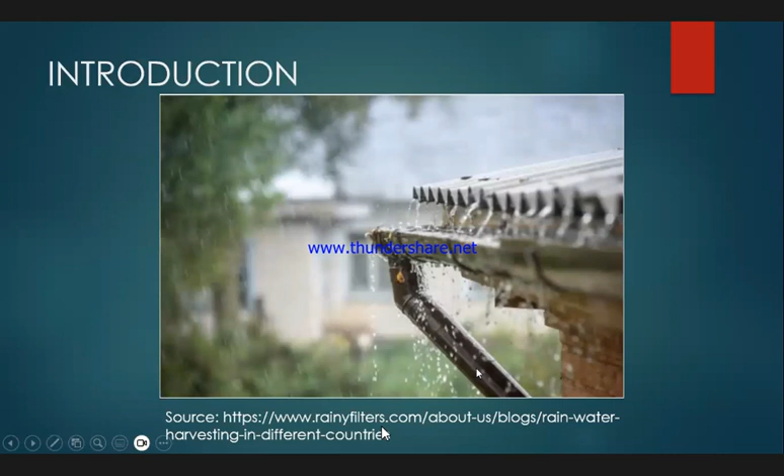We are all aware about the value of water. We can survive for 21 days without food, but barely 3 days without water. The existence of a planet can be justified through the presence of water. Globally, the majority of the Earth's surface is salt water and only 2.8% is fresh water. This fresh water can be found in groundwater, lakes and streams, and in glaciers and ice caps.

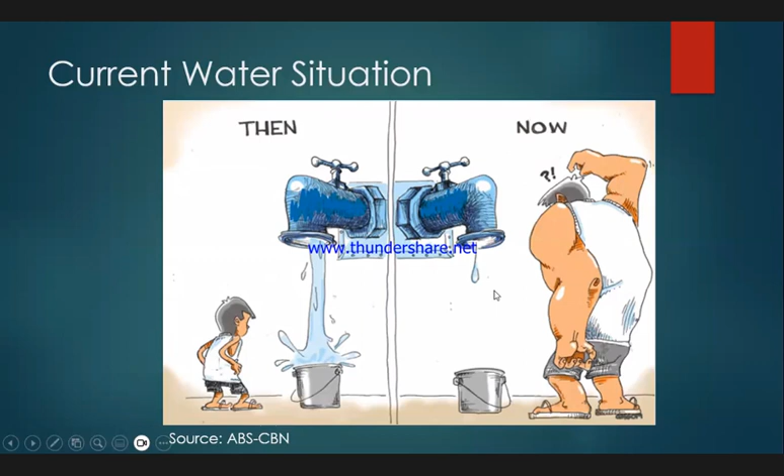This caricature is very significant, and it shows the current water situation, not only in our country, but globally. The then and the now really exists, and it speaks for itself. We had too much water then, but now we are experiencing water stress, and we can blame it on population explosion, which nobody can control.

Let's take a look at the water cycle. It follows the path of water within the earth and in the atmosphere. What we really expect as common people is that rainwater will become groundwater or fill surface water sources. But the reality is, when rainwater becomes groundwater, there's a possibility of it being over-extracted, or when it fills surface water, there's always the tendency of contamination.

In other parts of the world, water is being harvested in its vapor form, but that is too technical and expensive. There is something easier that has already been practiced in the Philippines and all over the world, but it's not yet taken seriously, especially in our country. We are always focused on groundwater and surface water, and we forget that we have an option: to harvest rainwater before it reaches the ground.

As I was saying before, harvesting rainwater is not a new practice. It has been practiced in the Philippines and all over the world. But before that, I would like to reiterate that we have groundwater and surface water issues, especially in our country. In 1998, the National Water Resources Board, through its National Water Resources Master Plan, identified 9 water-stressed cities. But recently, through the completed projects of NWRB, the problem is extended to other cities and municipalities in the country.

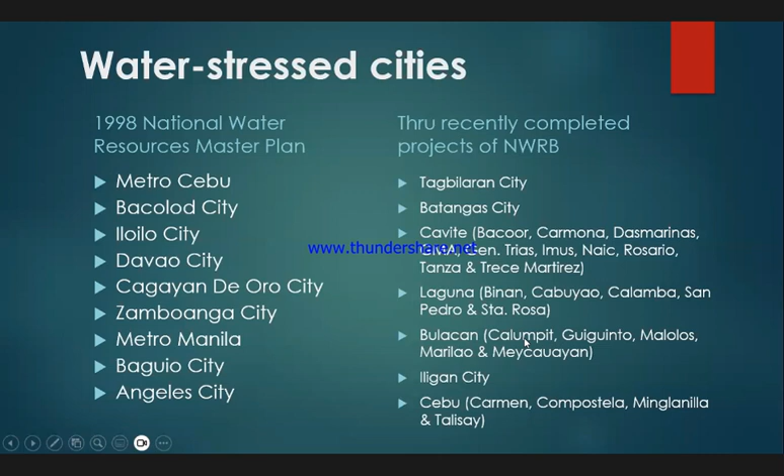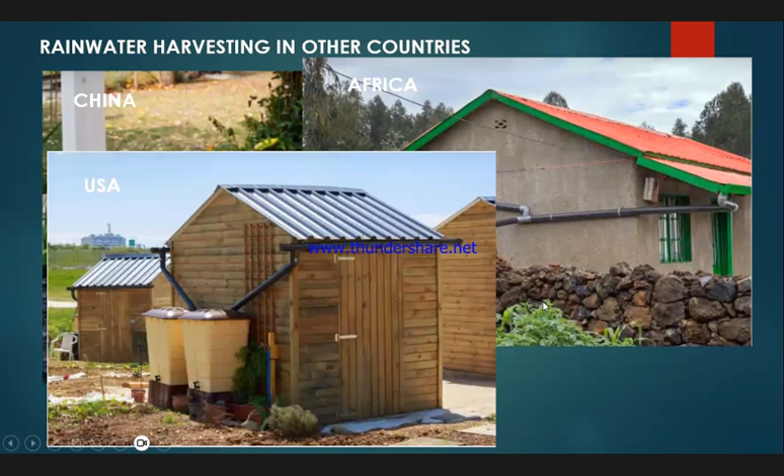So this is the reason why we should consider an alternative: rainwater harvesting before it reaches the ground. Rainwater harvesting has been practiced remarkably in China, Africa, the US, India, and Australia. In Australia, I was able to personally witness a treatment facility for rainwater, or stormwater for that matter. They don't just collect rainwater that falls on roofs.

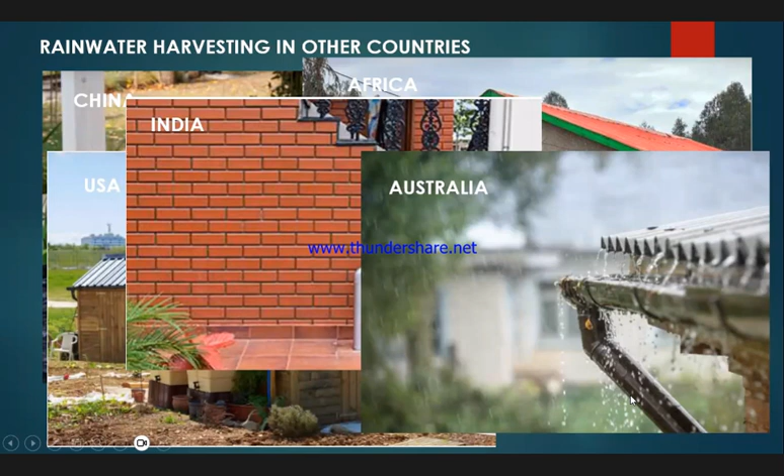They collect all rainwater and stormwater, and they are actually adopting a separate system of sewerage, wherein stormwater directly goes to the facility for treatment. And of course, there are a lot of things behind that, and it's the people who benefit from it.

The objectives of this study include building a suitable prototype of a rainwater harvesting system that will optimize the amount of harvested rainwater in meeting the daily water consumption of a single household, to determine if the quality of the filtered harvested rainwater will satisfy the Philippine national standards for drinking water, and to establish the economic viability of the proposed design of the rainwater harvesting system.

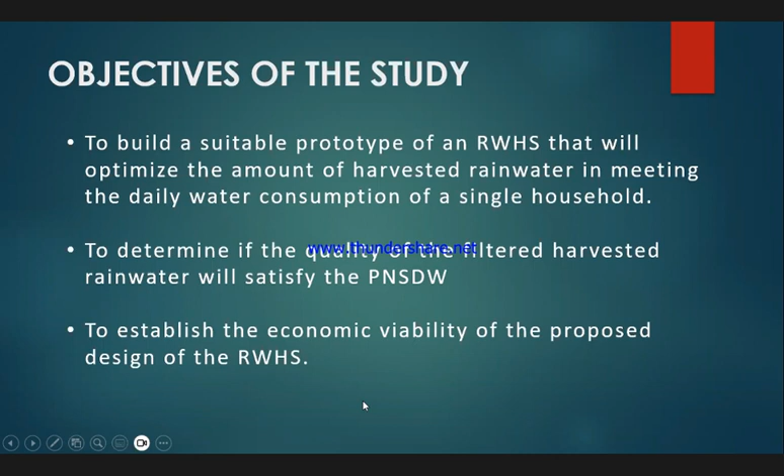The study area is located in Malaybalay, Bukidnon, and the area has a type 4 climate. The type 4 climate indicates that rainfall is more or less evenly distributed throughout the year, although during February, March, and April there is a lesser rainfall amount.

So why Bukidnon? Actually, we cannot propose something like this in Metro Manila or in other cities because we are enjoying taps in our houses, and I think this will not be attractive to people in the National Capital Region. That's why we chose Bukidnon as the study area, and also because many areas are not yet...

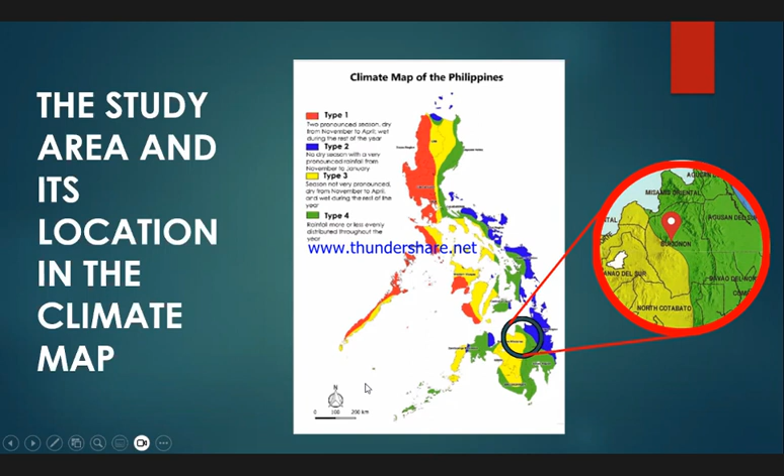...catered by water utilities. The methodology includes data gathering, installation of the rainwater harvesting system, the harvesting period, and data analysis. For data gathering, all meteorological data were gathered from PAGASA.

Water demand is considered 80 liters per capita per day in Region 10, based on an NWRB publication. The average household size, based on the Philippine Statistics Authority, is 5 persons per household. The rainwater harvesting potential is calculated using the rational method, Q = CIA, where C is considered 0.90 to account for losses, including evaporation and others.

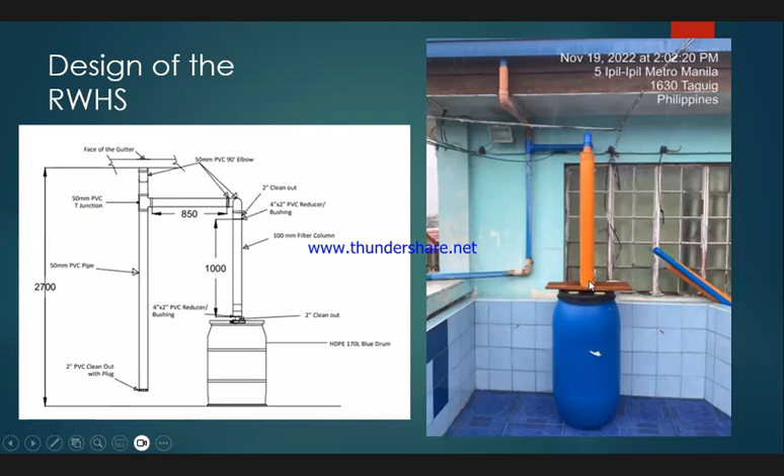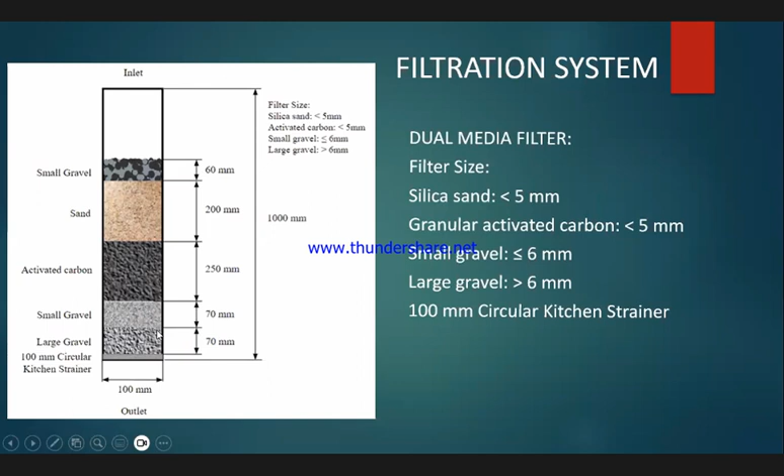The rainwater harvesting system was installed in October to November 2022, and the samples were taken in December 2022. Six rainwater samples were collected for quality testing, three unfiltered and three filtered. The parameters sampled were pH, iron content, and total coliform count.

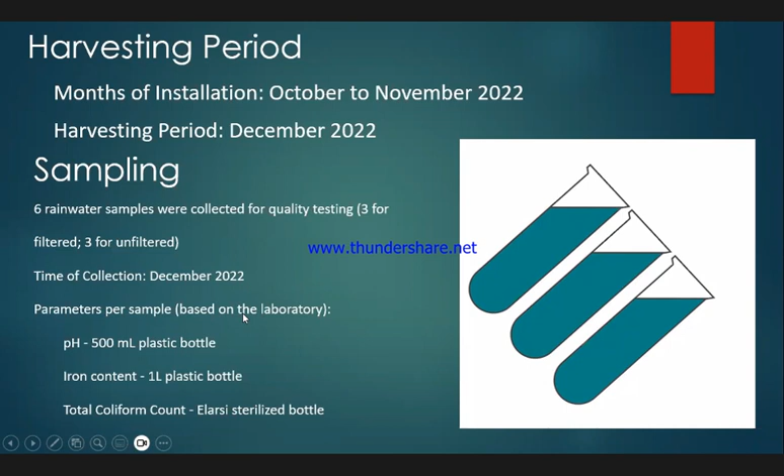Preservation and collection of samples were based on the instructions of the laboratory. For the data analysis, the data were analyzed for its sufficiency, water quality, and economic analysis.

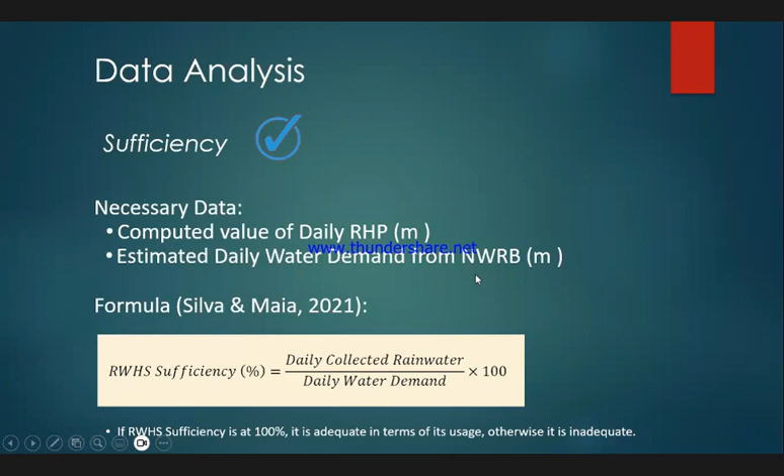For sufficiency, the formula used was daily collected rainwater divided by the daily water demand. If the sufficiency is at 100%, it is adequate. Otherwise, it is inadequate. By the way, I would like to mention that the catchment areas considered in this study are the roof areas of the residential houses.

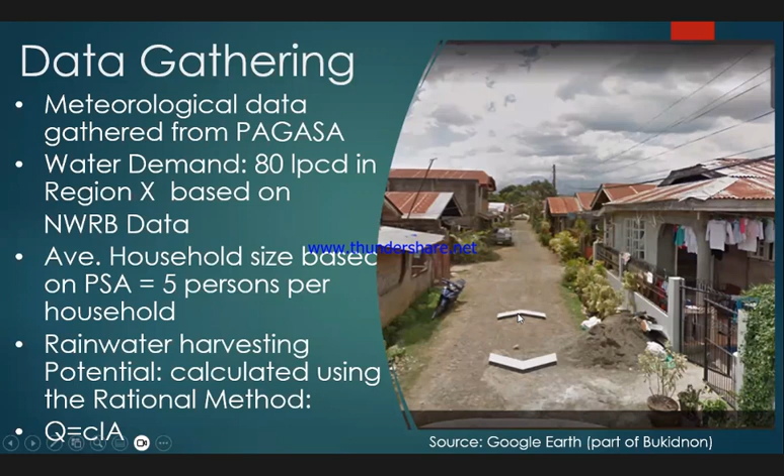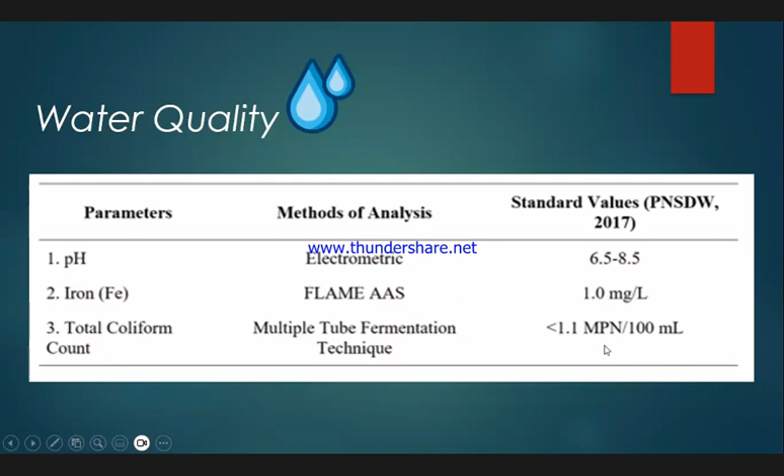For water quality, pH, iron, and total coliform were compared with the Philippine National Standards for Drinking Water. For the economic analysis, the payback period was used, calculated using the construction cost of the installed rainwater harvesting system divided by the water savings.

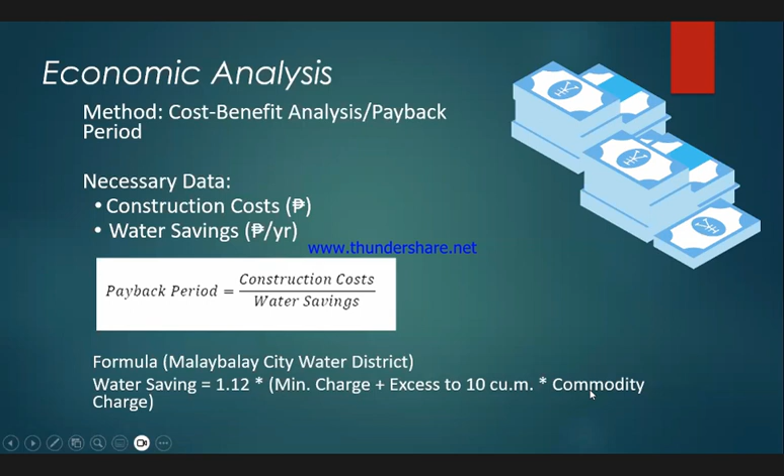The water savings was calculated using the formula of Malaybalay City Water District, and it includes the minimum charge, in excess of the minimum amount of water that is supposedly used by the constituents, and commodity charge.

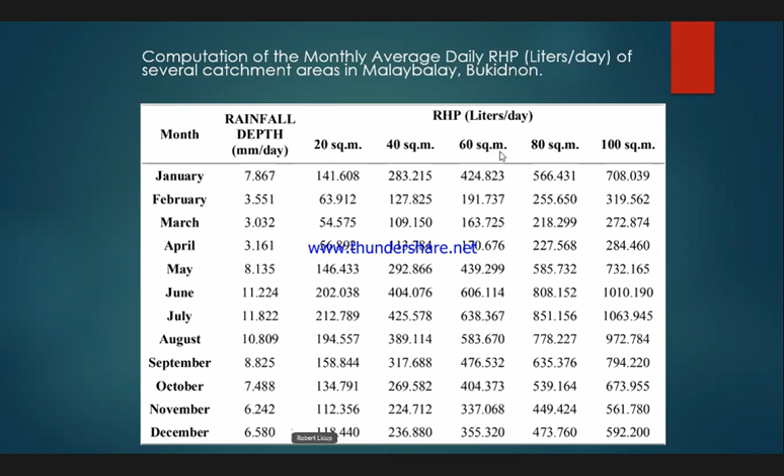The first column shows demands, rainfall depth as gathered from Pag-asa, and these are the rainwater harvesting potential in liters per day of different roof areas. So we considered 20 square meters, 40 square meters, 60 square meters, 80 square meters, and 100 square meters.

The comparison was graphed, and we can observe from this figure that the green line represents the daily water demand. It was observed from the graph that houses with areas of 20 and 40 square meters do not meet the daily water demand, while roof areas with 60 square meters and above can meet the daily water demand for all months except February, March, and April.

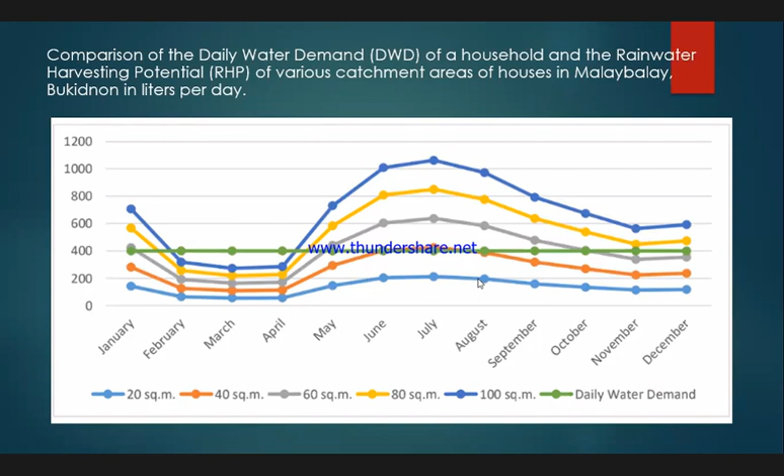But then we can observe also a surplus in this part of the graph, and the surplus can be used and stored to be consumed or to cater to constituents during the lean months of February, March, and April.

Consistent with the last slide, the values of sufficiencies were also calculated. As mentioned in the previous slide, using the formula for sufficiency, it appears that for catchment areas or roof areas with 60 square meters and above, sufficiencies are around 100% and more. So it's consistent with the last slide that roof areas with 60 square meters can satisfy the daily water demand.

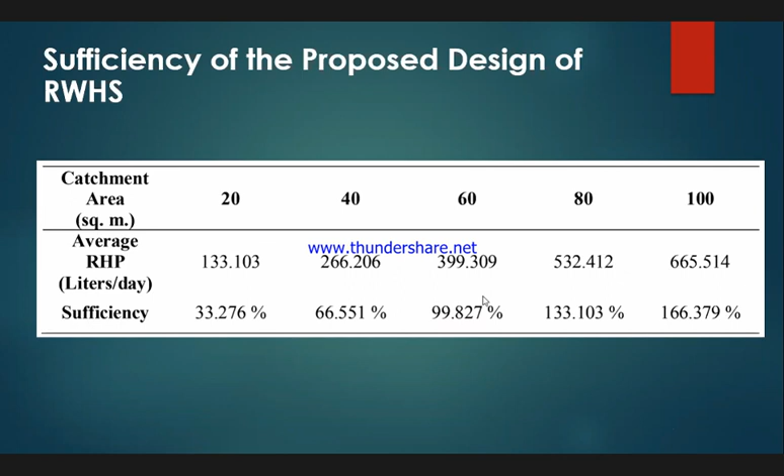For the water quality analysis, pH and iron, although the values are from unfiltered rainwater results from the laboratory, these two values are within the Philippine National Standards for drinking water.

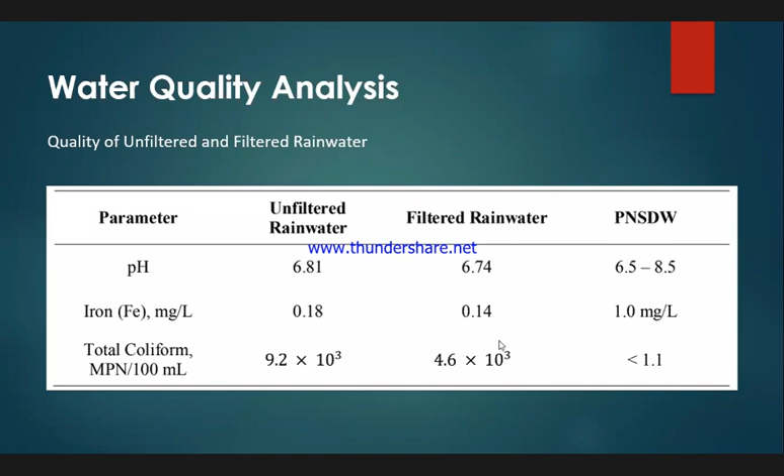Although after passing through the filter column the values have been adjusted, they are still within the Philippine National Standards for drinking water. But for the coliform count, although it has been reduced to a certain value, it does not meet the standards for drinking water.

Okay, so for the economic analysis, this table shows the monthly water demand, monthly daily water demand. This column represents an average of 5 persons per household, and 80 liters per capita per day water requirement, which is 12 cubic meters per month.

Now, this rainwater harvesting potential has been calculated in the previous table, and this savings is actually calculated using the formula used by Malaybalay City Water District. It also appears that there will be more savings if the roof area is 60 square meters or more.

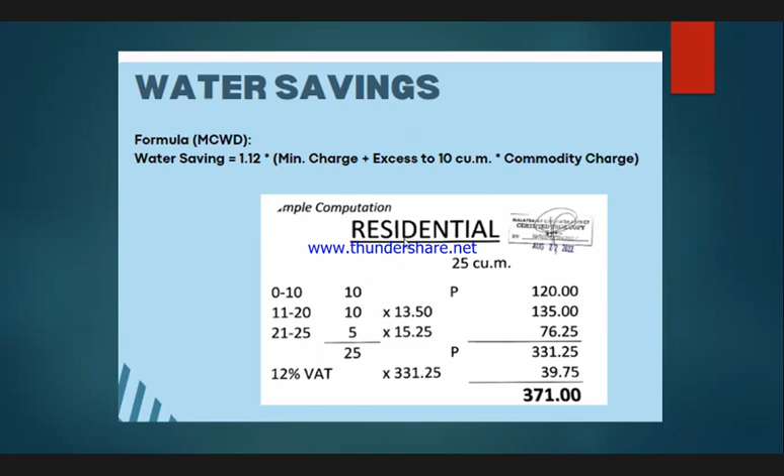This is how the water savings is calculated. Now, the water savings in this particular study refers to the amount that they are supposed to pay to Malaybalay City Water District if they are connected. In other words, if they install their own rainwater harvesting system, the amount they would have paid to Malaybalay City Water District is considered the savings.

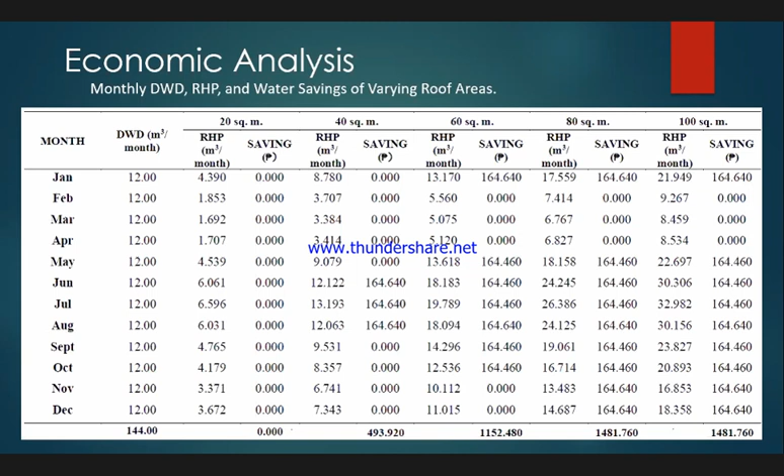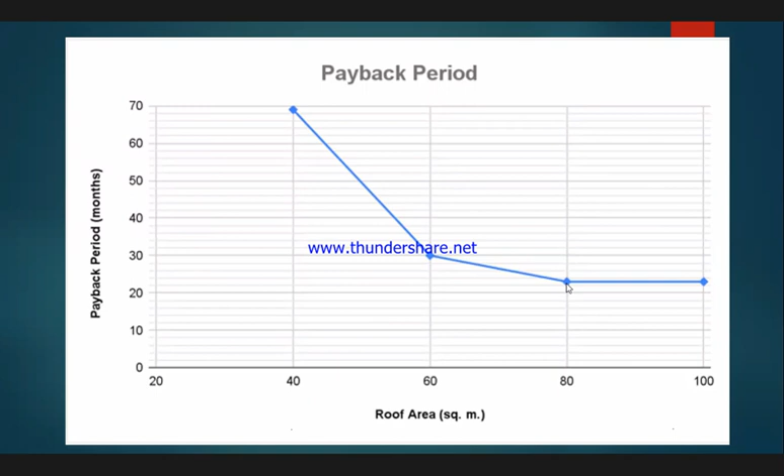And using the payback period for the 60 square meters roof catchment and above, the payback period is around 30 months for catchment areas with 60 square meters, and around 24 months for catchment areas with 80 square meters and above.

So, in conclusion, the proposed rainwater harvesting system in Bukidnon is sufficient for 60 square meters and greater catchment areas. pH and iron content are adjusted by the proposed filter column, although in this particular experiment, pH and iron need not be adjusted anymore because they are already within the Philippine National Standards for Drinking Water.

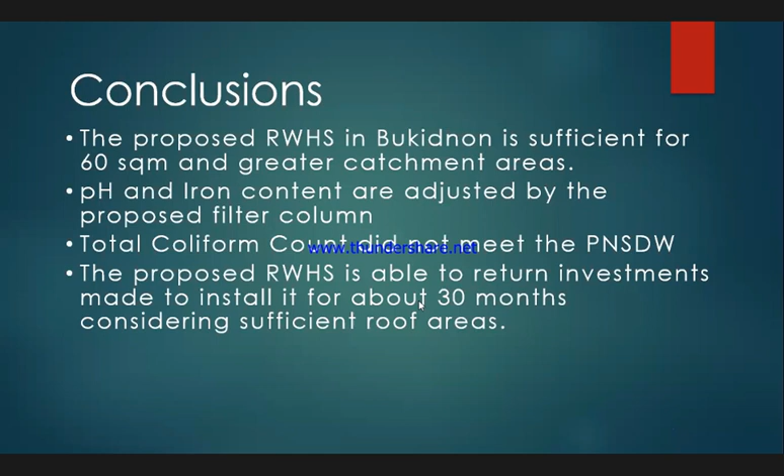The total coliform count did not meet the Philippine National Standards for Drinking Water. And lastly, the proposed rainwater harvesting system is able to return investments made to install it in about 30 months, considering sufficient roof areas.

For the recommendations, we recommend considering the possibility of disinfection after filtration, especially if the water is intended for drinking. Also, it is recommended that testing of other parameters be done to test the efficiency of the filter column.

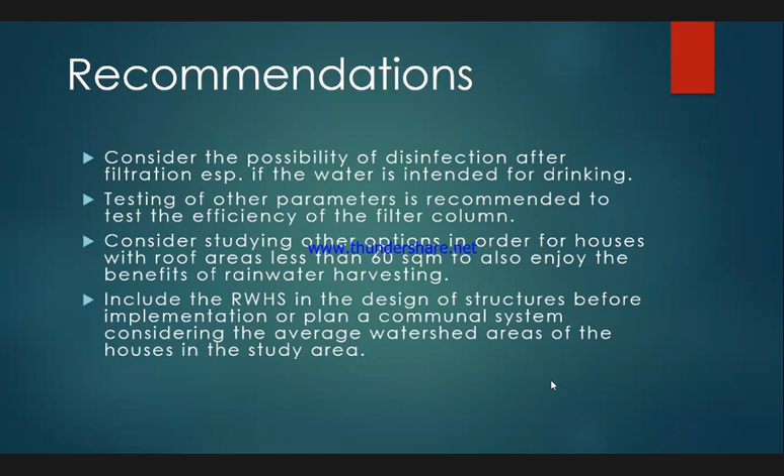Consider studying other options in order for houses with roof areas less than 60 square meters to also enjoy the benefits of rainwater harvesting. Finally, it is recommended that rainwater harvesting systems be included in the design of structures before implementation, or plan a communal system considering the average watershed or catchment areas of the houses in the study area. And these are the references.